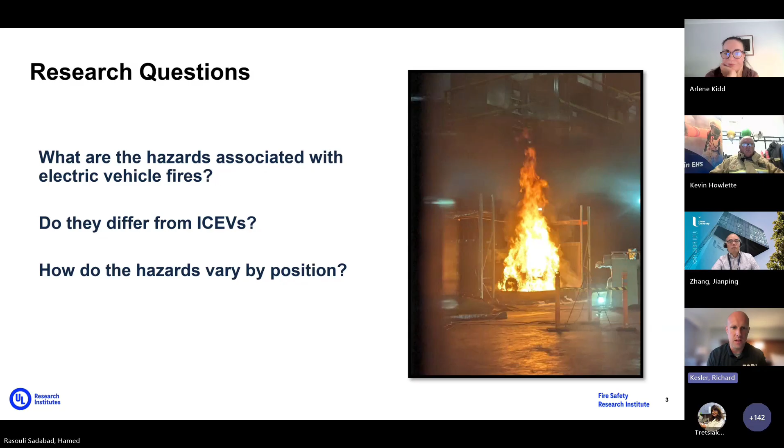So to do that, we conducted a number of tests, electric vehicle tests, including internal combustion engine vehicle tests, at a large-scale fire lab just outside of Chicago in Northbrook, Illinois. As I mentioned, we took measures of the fire behavior, trying to understand what the thermal properties were, the risks of fire transfer, the heat flux, temperatures around the vehicle, and we're working on reporting those later this fall.

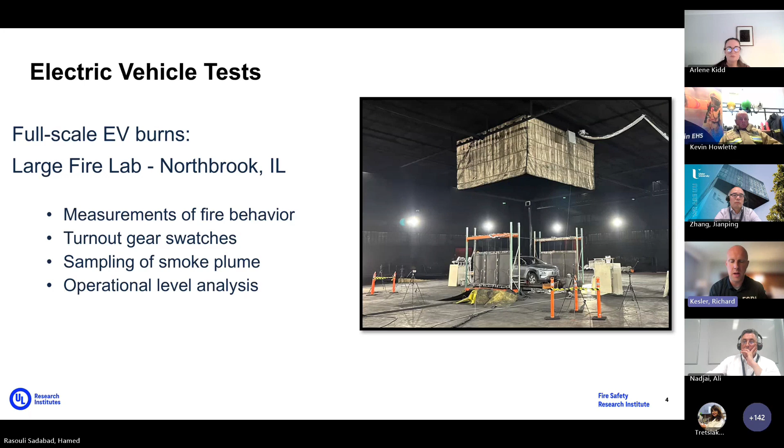We also had turnout gear swatches, which I'll talk a little bit more about, placed around the vehicle, and we're looking at the characterization of the contaminants that get onto the turnout gear, and how those contaminants can be removed through laundering and other cleaning practices. We monitored the plume, taking samples of the smoke for various compounds, and then did some analysis at the ground level or the operational level where firefighters or other responders might be. Next slide.

Thank you. So we set up these sampling stations at multiple positions around the vehicle. Here you can see the yellow rectangles in front of and behind the vehicle. They're positioned about 3 meters off of the front and 4.5 meters off the back of the vehicle. And these sampling stations contained a number of different metrics. I'll just discuss a few of them.

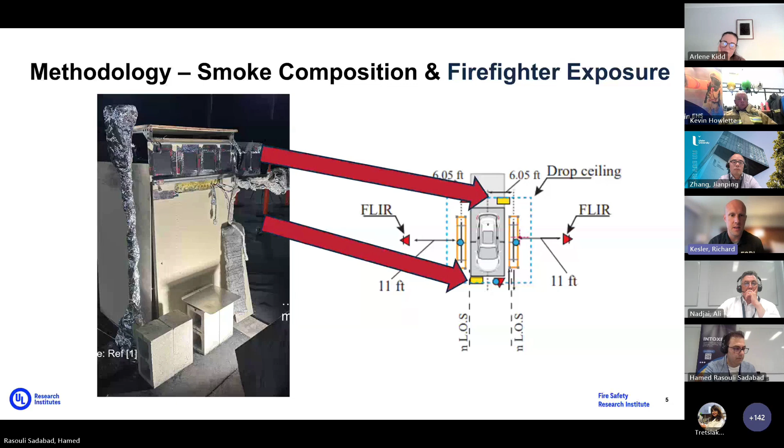Here you can see the black rectangular turnout gear swatches across the top. There's 4 of those. The large instrument on the left, wrapped in aluminum foil, is a heat flux gauge, so we could get a heat intensity. We have a pan at the bottom, a flat sheet, to collect solid particulate that deposited around the vehicle, which are all going to be reported elsewhere. But today, if you click to the next, I'm going to be highlighting

our active sampling techniques. So we used active sampling pumps here to measure the compounds listed there: benzene, toluene, ethylbenzene, xylene, aldehydes, metals, acid gases. We measured isocyanates, PAHs, and inhalable particulates, all with these active sampling methods. These pull air from the environment through the media, which is the top of the gray box there, and then we send those media off for analysis to quantify what's in the environment.

And one important note is that these will collect samples across the entire duration of the test. So we're looking at average concentrations in the air from the time the fire is ignited until everything that can combust has, and we reach the end of flaming combustion.

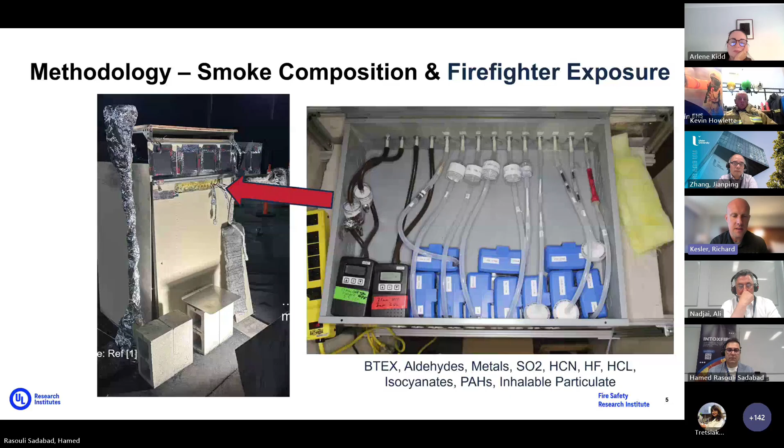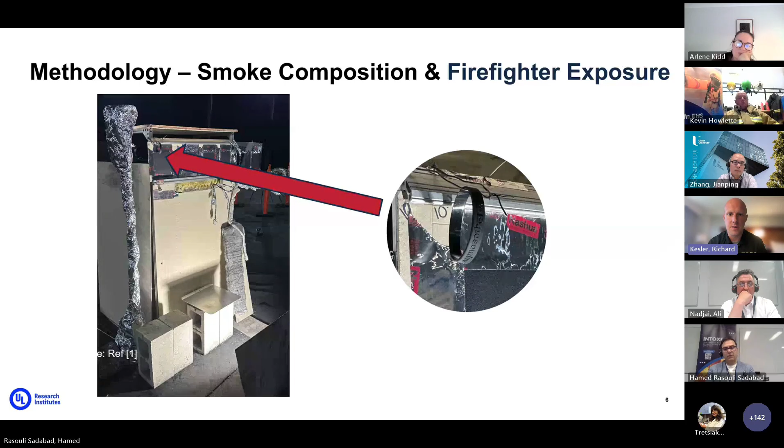Next. We also had passive sampling measures, so we used silicone wristbands placed around the vehicle and in the plume, which passively collect both vapor and particulate, and then we analyzed those. I'll discuss that in a little more detail later on. Next slide.

We took both the active sampling and passive sampling measurements and fixed them to a position above the vehicle. So what you see in the picture on the right is the vehicle placed on a platform, which in this case had scales in each of the four corners so we could measure mass loss from the vehicle. And then the smoke plume went up into the curtain you see above.

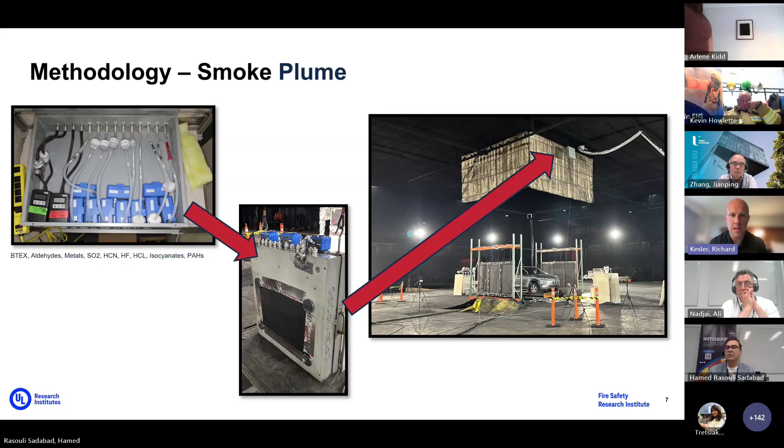That curtain's hung just a few centimeters below the ceiling so that we could kind of funnel the smoke produced by the vehicle. And then the small gray box up there at the top where the arrow's pointing is our sampling media. So we have a large turnout gear swatch and then both the active and passive sampling media up there. Next slide.

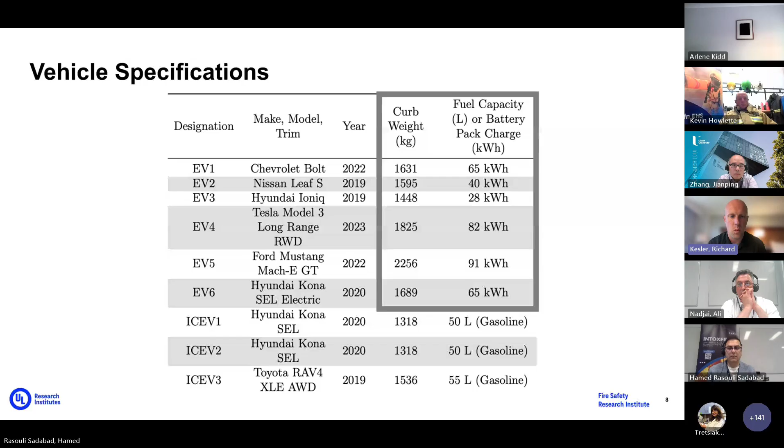Here's the list of the vehicles we tested. In this comparison, we have 6 EVs and 3 internal combustion engine vehicles. Sorry, that went fast, but you can see the battery sizes there ranging from 28 kilowatt hours up to 91 kilowatt hours. And importantly, these are on the smaller end of the battery sizes, or I guess the more common end, although we do see consumer vehicles that are in excess of 200 kilowatt hours available for sale in the United States right now. So we are a little bit on the smaller end with our testing, and that should be noted.

The box that you see there now highlights 3 vehicles that all had the same basic car model, just with different propulsion systems. So as we go through any of those that have the red indicator, just note that those are the same vehicle across different propulsion systems. Next slide.

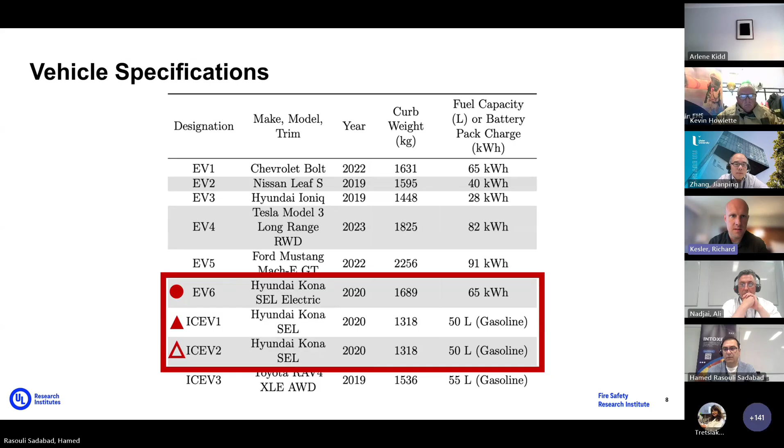In terms of timing of how long the burns took, the total column height here is from the start of ignition through the end of flaming combustion. And what we see is that the EVs and the internal combustion engine vehicles had some slight differences. The EVs, from ignition of the pilot burner until conclusion, were about 102 minutes versus 65 for the internal combustion engine vehicles. And if you advance one, please.

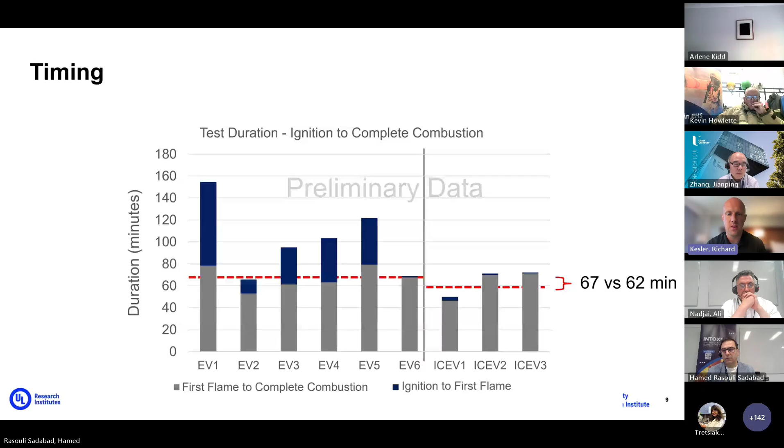But when we look at just the gray portions of the bar, which is the time from when the flame transferred to the vehicle until the end of flaming combustion, we see that the difference was really much smaller and potentially not statistically significantly different. We see a difference of only 5 minutes from the time the fire reached the vehicle until the time flaming combustion had concluded. Next slide.

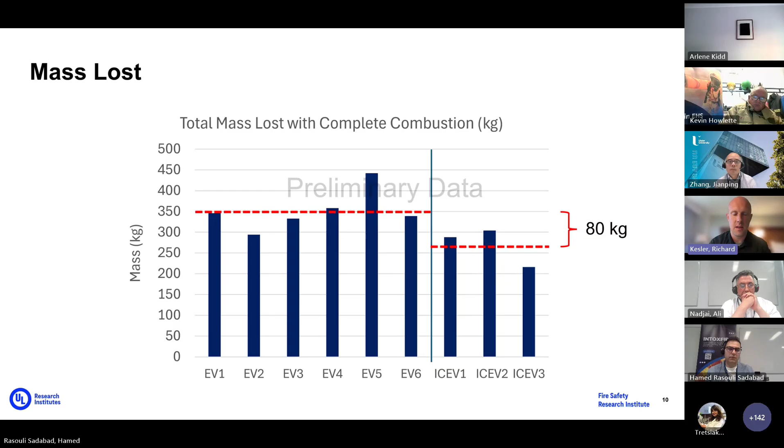Looking at the mass loss of the vehicle, the EVs had about 80 kilograms more of mass lost by the end of it. And what that means from an exposure standpoint is that 80 more kilograms of material were produced into the smoke and generated into that cloud that are potentially available to contaminate the environment or the firefighters or other responders. Next slide, please.

So I will walk through this plot because it is very similar to how much of our data are presented. On the left, the different compounds we tested for both EVs and internal combustion engine vehicles. Each of the circles represents a specific electric vehicle, and each of the triangles represents a specific internal combustion engine vehicle. The X's represent the median for each group. And as I noted, the red symbols, either circles or triangles, represent the same vehicle just with different drivetrains.

And so what this plot is showing is the different metals that make up the battery composition. So we've got lithium, obviously, in the batteries, and then manganese, cobalt, and nickel. And what we see, not particularly surprisingly, is that in the electric vehicles, these compounds are substantially higher. And if you advance one, please.

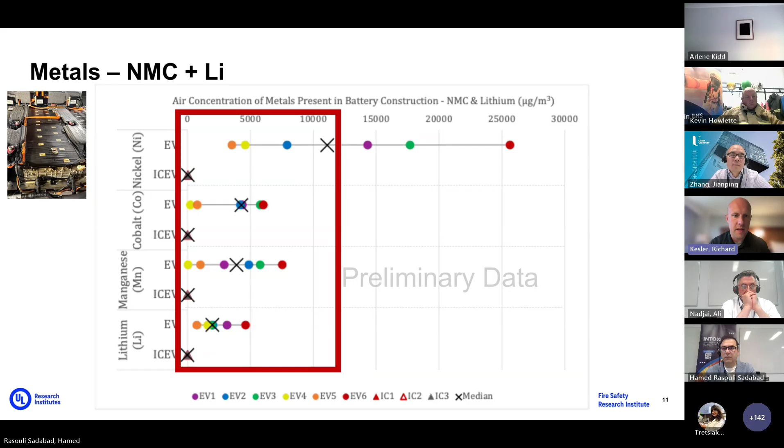If we look at those BTEX compounds that I mentioned earlier, specifically in the plume, we see that there's some pretty broad ranges between the different makes and models of the vehicles, but there's really no distinct difference between internal combustion and electric vehicles in terms of the fires from a BTEX standpoint.

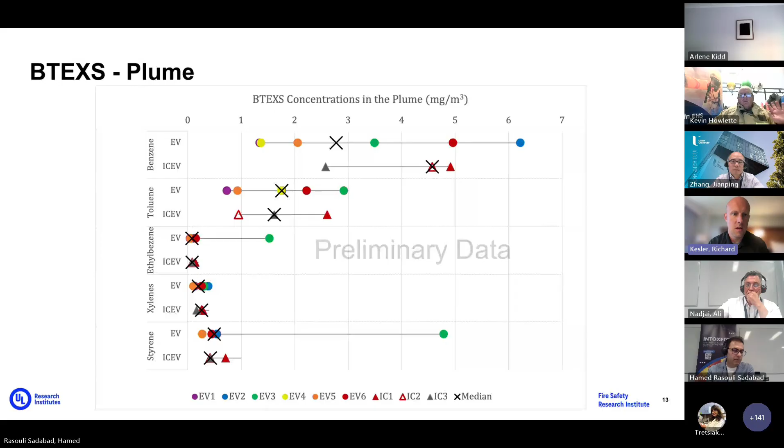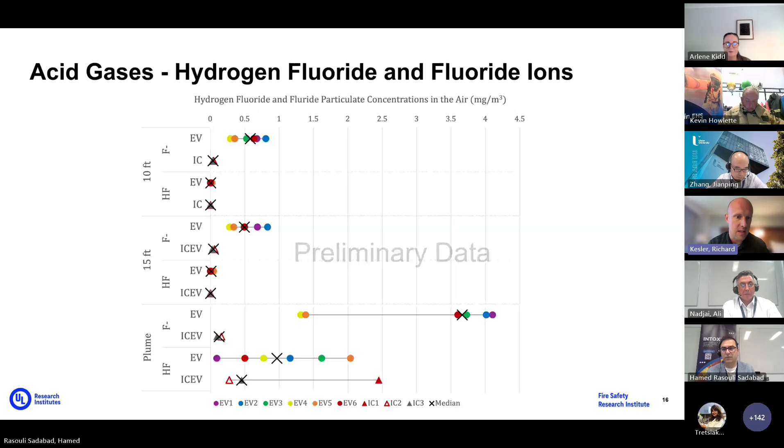As we go to the next slide, here we're looking at the differences between hydrogen fluoride and then fluoride as a particulate, or the ion. And this is where we really start to see some of those differences. So at both 3 meters or 10 feet and 4.5 meters, 15 feet, we see that the EVs have substantially higher fluoride particulate than the internal combustion engine vehicle counterparts. And that carries through also to the plume. Next slide.

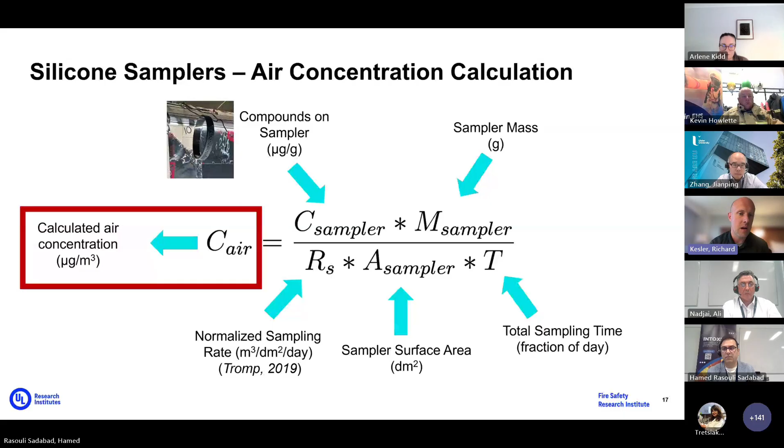We also used, as I mentioned, the passive samplers. I won't go through this entire slide, but based on some calculations, we're able to get a calculated air concentration based on the levels of compounds we detect on the samplers. So next slide. So I'll go through the PAHs we discussed. This list is the U.S. Environmental Protection Agency's 16 priority PAHs, 10 of which are possibly, probably, or known carcinogens.

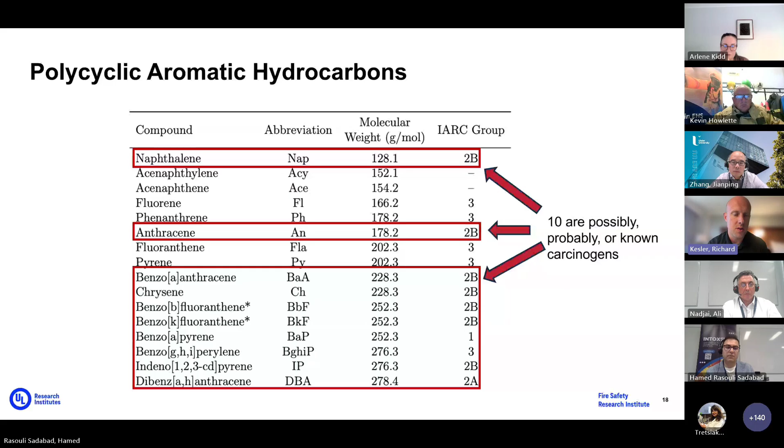So just to recap, between the vehicles, we had a similar burn duration, although the EVs took a little bit longer to get started with our gas burner. We did have greater mass loss with the EVs. As expected, there were high levels of the nickel, manganese, cobalt, and lithium metals in EVs, which are used in the manufacturing and construction of the batteries.

The acid gases were similar across the vehicles, although fluoride particulate was elevated, which is a major concern and can be a known irritant and potentially toxic compound. And then PAHs were similar also, although, again, as I mentioned, with the fuel potentially resulting in slightly higher medians in those internal combustion engine vehicles. Next slide, please.

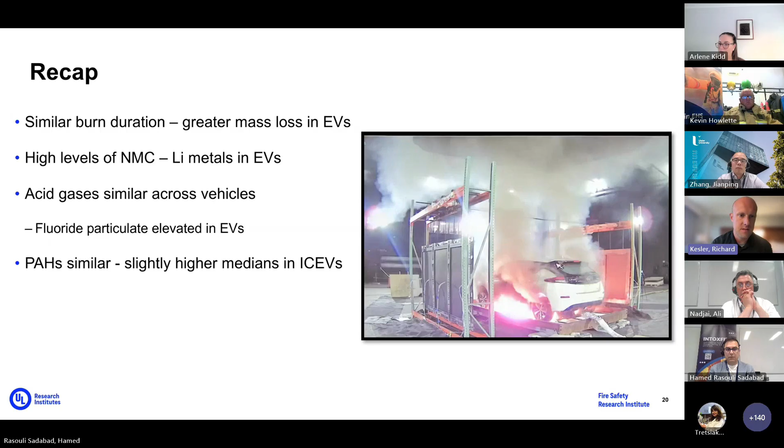So where are we going now? We've just wrapped up testing, looking at suppression of these vehicles. So in all those tests, again, there was no firefighting intervention. We let the fires run from ignition all the way through the end of flaming combustion. But we have run the tests and are currently analyzing the data to look at standard firefighting techniques. So that's just the water and hose line.

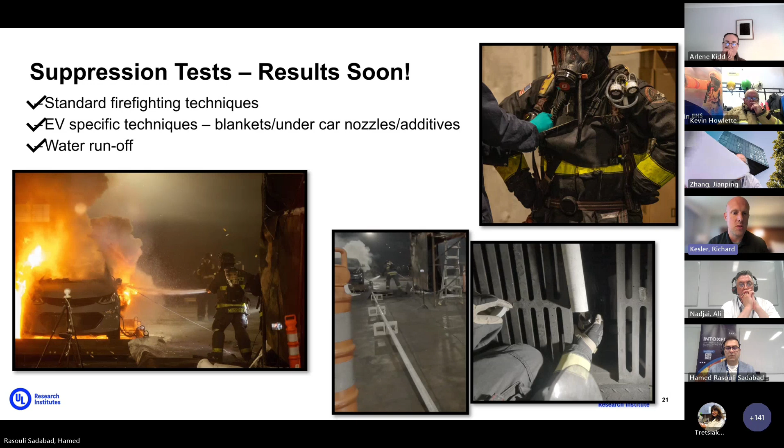We've looked at EV-specific techniques, applying fire blankets, utilizing undercar nozzles, placing additives in the water, and understanding how those impact contamination. And then through all these, we've collected the same measures, but we've also placed a number of those measures on the firefighters doing the suppression, and then collected the runoff water to see if there's any differences in what's produced into the water or on the firefighters. Next slide.

So with that, just want to acknowledge Adam Barowy, Gavin Horn, Chandler Probert, Nate Sauer, our research team who's worked on this project, as well as the entire FSRI team that made these massive studies happen. They were conducted in partnership with our sister organization at UL Solutions. And then much of our assessments wouldn't be possible without our partners at Duke in North Carolina, as well as the National Institute for Occupational Safety and Health. So just want to thank them.